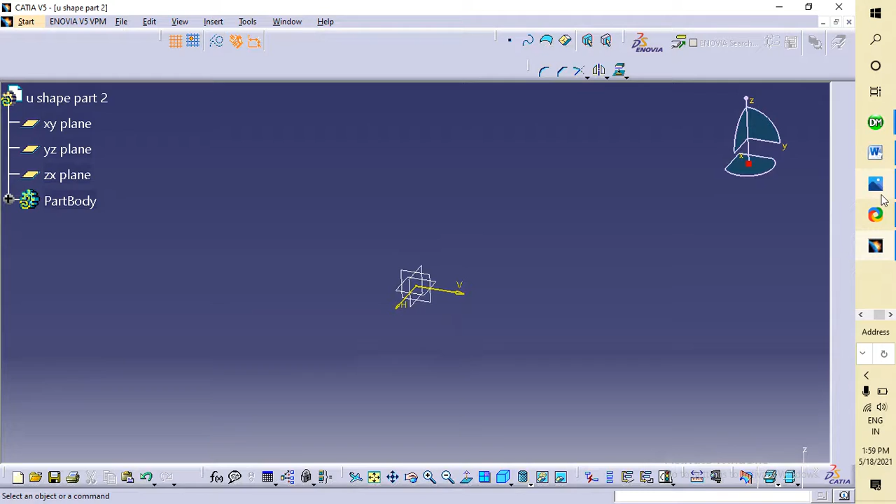This is the first part we'll make, the U-shape part. I'll delete this one, select this part and go to sketch. Let me show you guys the other part - this is the U-shape part. I already zoomed in here.

Okay, let's go. My battery is okay, sorry guys. So now I am going to select this center rectangle and double click on it so that you can frequently use it. It is 50.

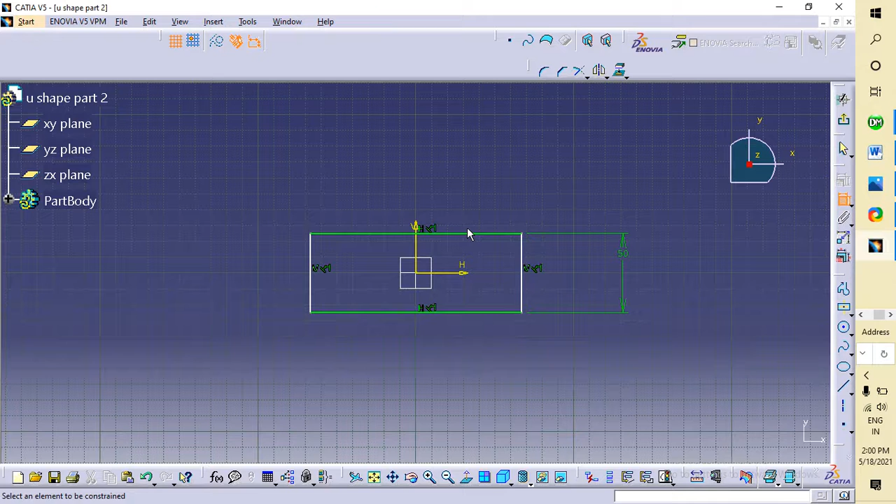What is this? This is 80 excluding this 20. You can make it either way - you can take 80 from this cross section and make 20, or the other way is first make 100 and from this top surface extrude this 20. Both ways work, no problem. So now it is 80.

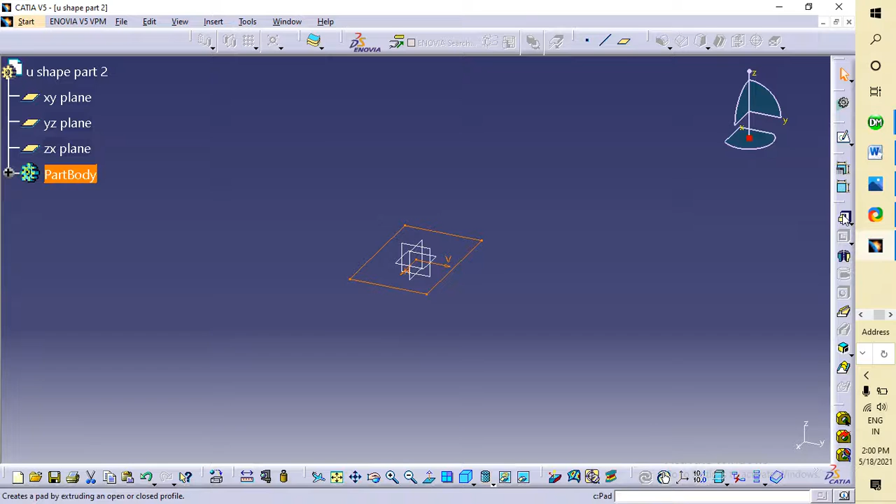Go to exit workbench. I will show you guys what I'm saying. It is 20 already here, no need to type, you can type it on your screen. So now if I make the 100 length, then I am drawing the upper part from this top surface.

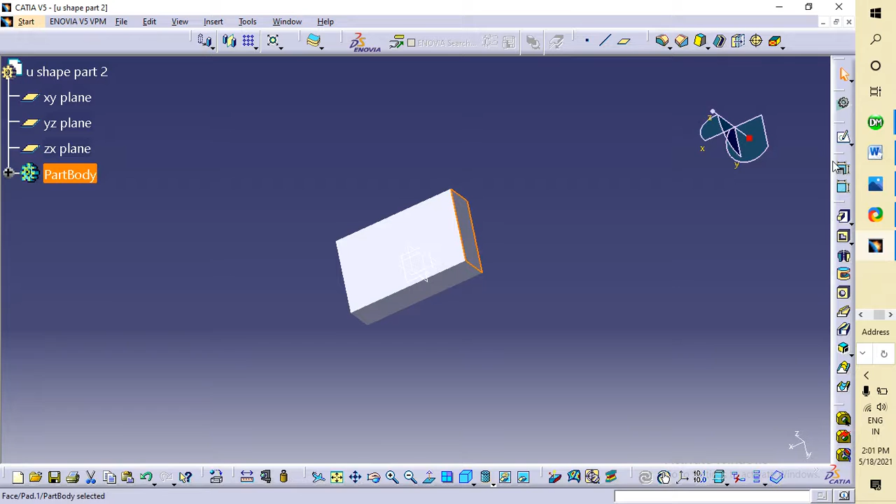Now I only take the 80mm length, so I am selecting this part and now zoom to fit. Go to zoom to fit guys, and then just select here. Then you have to do here and double click on it, select this one and give - this is 50 guys, there is no problem, it will coincide here.

Otherwise you have to make it coincide, I already showed you guys how to coincide - first select this one and then coincide with this. Okay let me make you see - this is the vertical distance, it is already 20 here and 30 here. You can see this is from here to here, it is 30 guys. How much? 30.

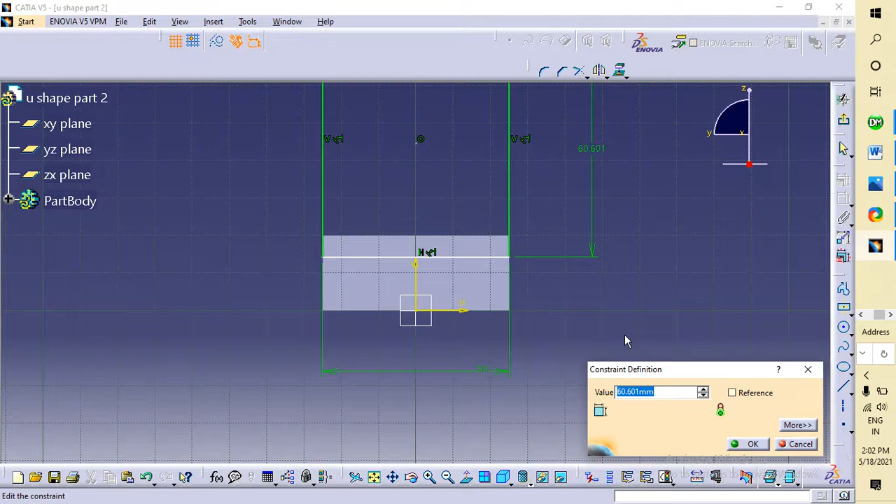Okay, I am taking this distance, let me take this for now. Now I have to make this one. Let me unselect it, I undo it, I already undid that part.

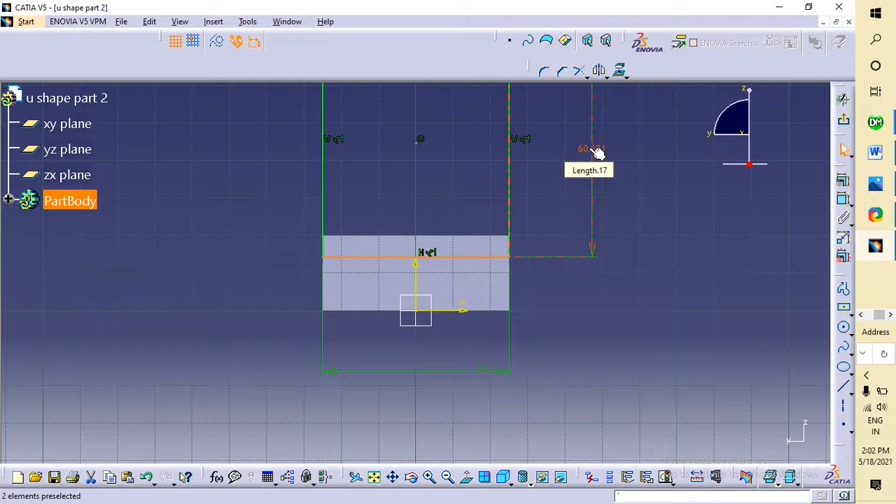So from this part and this part, go to constraint defining dialog box and coincidence. Now from here I am taking this dimension from here to here, so 30 plus 20, what? 50. I will give this as 50.

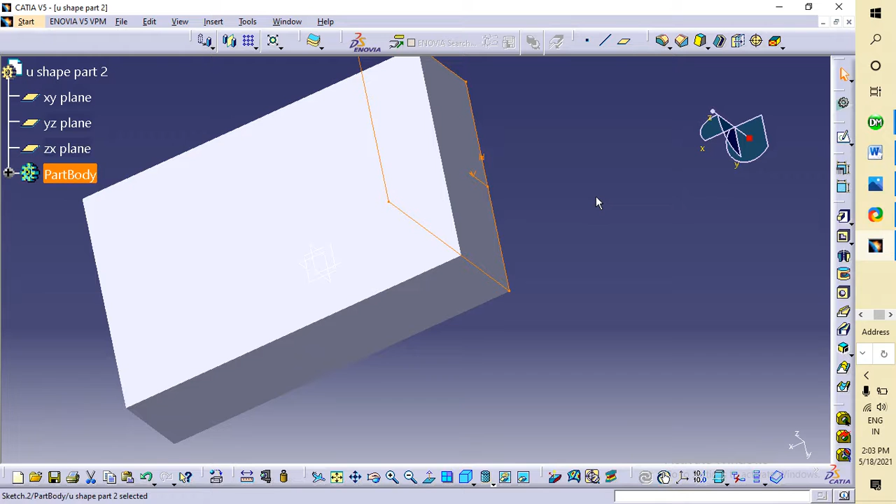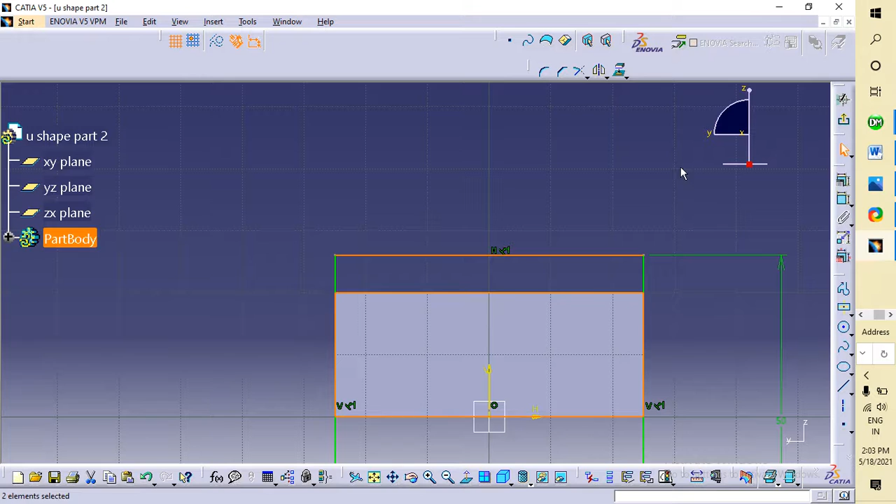Now what? No, I have to make this part below, that's why during the simulation I don't need to do much work. I am deleting this constraint command, go here and delete this one. Now what you have to do is it will move, and I am giving this and this as a coincidence. I already told you guys how to modify it also, just learn it.

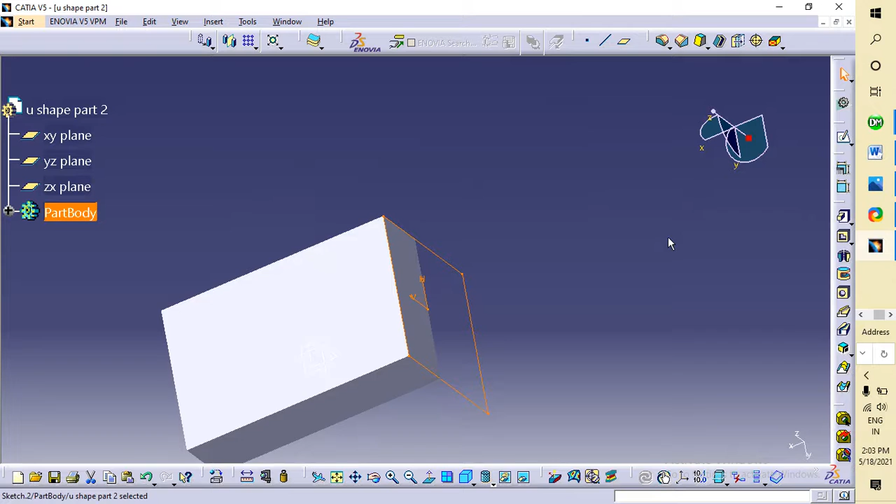No one is perfect guys, so I made a mistake - I made it for my own comfort. Now what you have to do is go to extrude, and this is 20, no problem guys, already here.

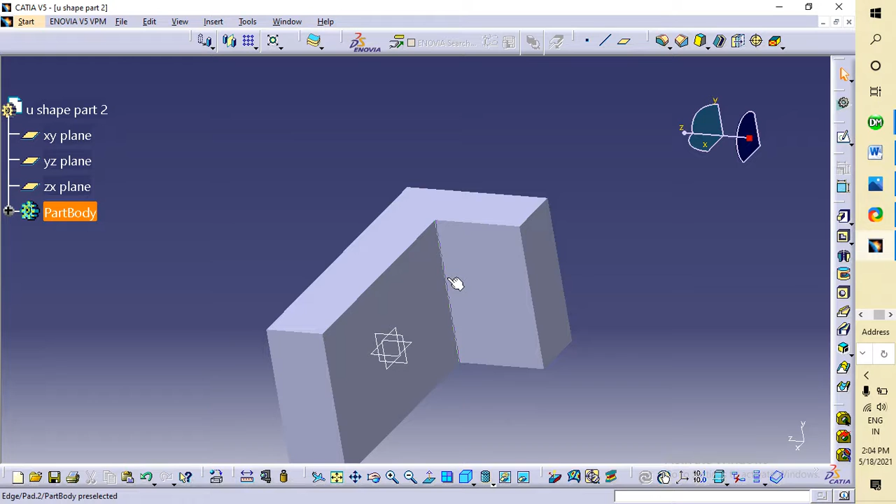Now the remaining part I have to do is draw this fillet. What is the fillet guys? It must be 15 - upper 15, lower 15. Select this one and go to fillet. Already here 15, now this is your required part.

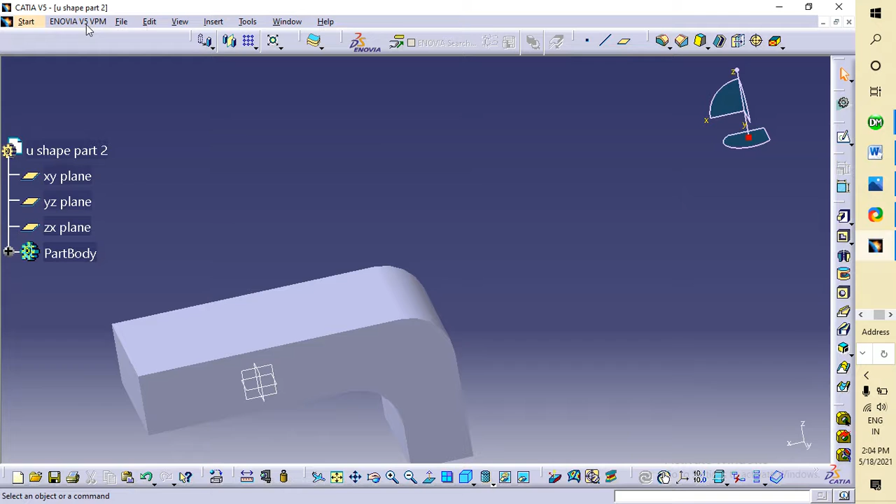This is the U-shape part of the clevis pin assembly. Now what you have to do is go to file, save as U-shape part 2, no problem.

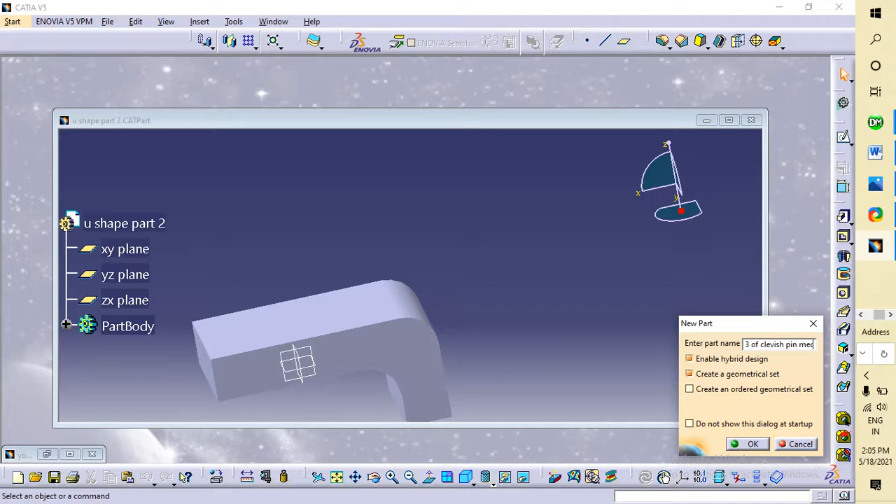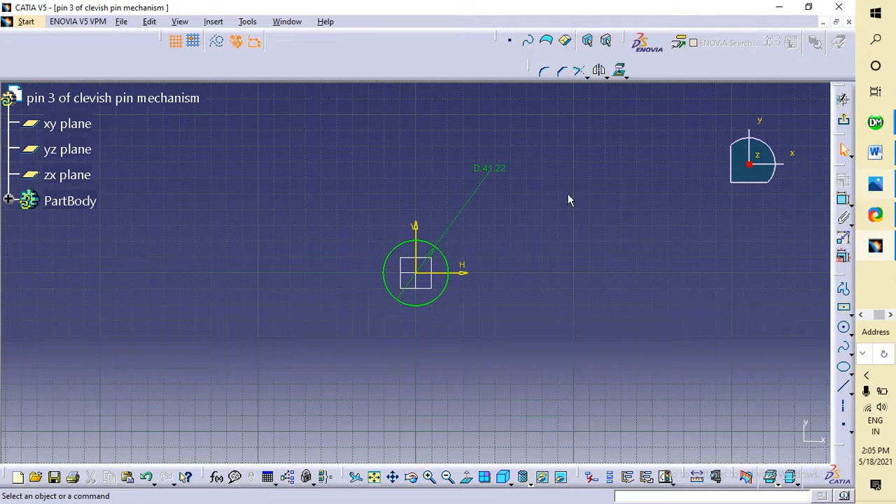Now I have to make the pin part - mechanical design, part design, this third part, pin third of clevis pin mechanism. Go to select this one and select this one, and I'm selecting this one. The pin is of circular cross section, giving dimension of 20, because the hole we made is radius of 10, so diameter must be 20.

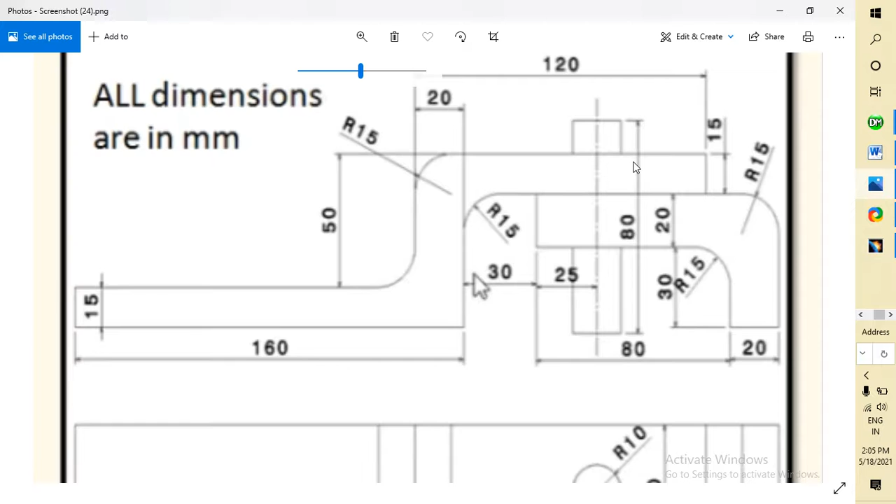What is the length? For length I'll show you guys some guidance here - from here to here its distance is 80. No problem, go here, and now I'm going to extrude 40. Why am I taking 40? I'm going to do a mirror action guys, so that's why I'm taking 40. Now this is my 80.

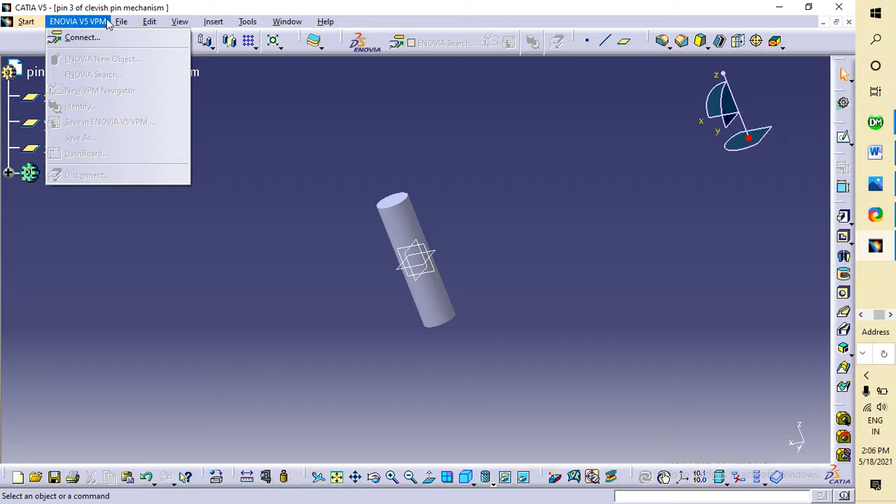Now I have to go to file. I already named it clevis pin mechanism, so pin third - but I'll show you guys how to save it also. So in the next video we'll make the clevis pin assembly, so in this video we'll make this part.

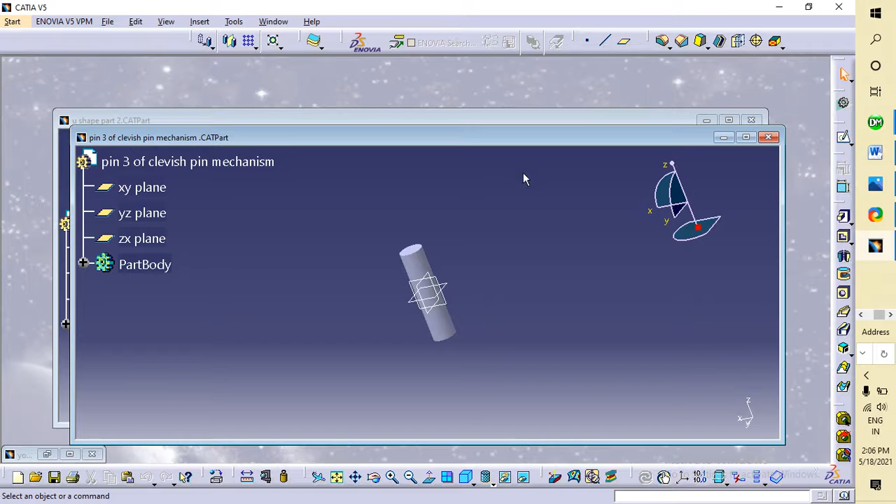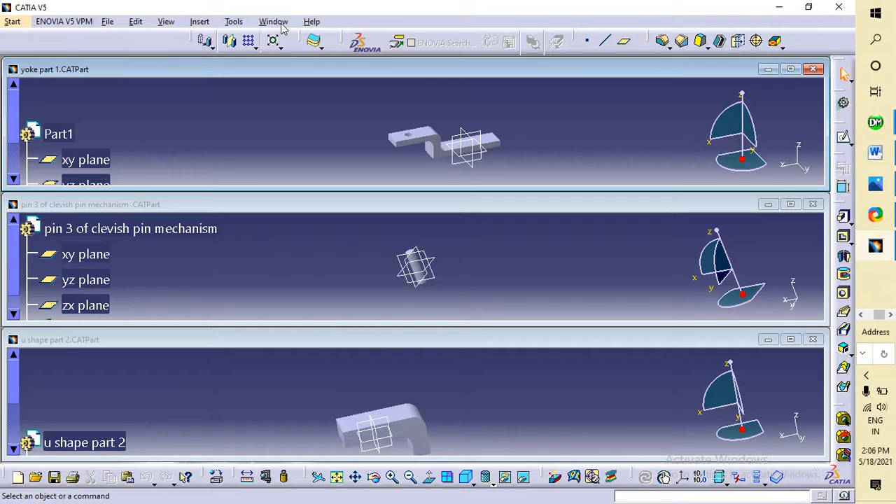Another feature is window - go to window, and in which style you want to see, cascade, it will show like this. I will minimize it. In window, it is extra knowledge guys - tile horizontally, yes, in this way it will come. Those who already know this feature, no problem, you can skip. Those who don't know, tile vertically guys - this is also okay.

In this way you can also see your windows. It will be very useful when you are working with many designs.